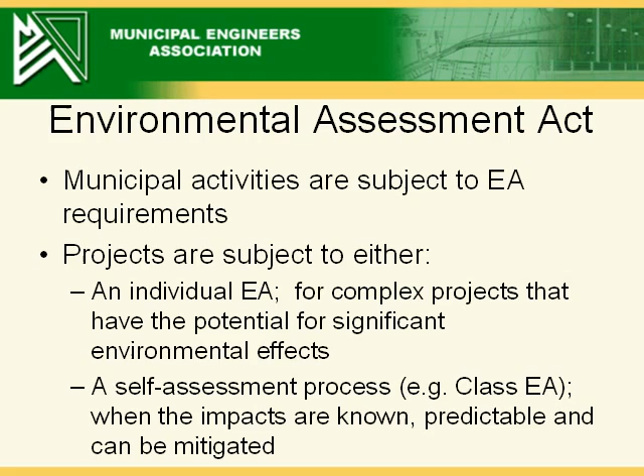What is a Class Environmental Assessment? A Class Environmental Assessment is a self-assessment planning process that allows proponents to follow an approved planning process for projects that are generally recurring, have a predictable range of environmental effects, and are responsive to mitigation.

The MCEA has been subject to review and approval under the EAA, which determined, in part, that the application of the MCEA process would enable proponents to meet the intent and purpose of the EAA for a specific group of projects. The MCEA provides a reasonable mechanism for proponents to fulfill their responsibilities to the public in an efficient, timely, economic, and environmentally responsible manner.

The nature of the project determines the level of assessment. The assessment is proponent-led. Projects identified in an MCEA are approved and conditional upon being planned according to the requirements set out in the MCEA, not being made subject to a higher order of EA. Part 2 order provisions allow the minister to require an individual EA if significant environmental issues or concerns warrant.

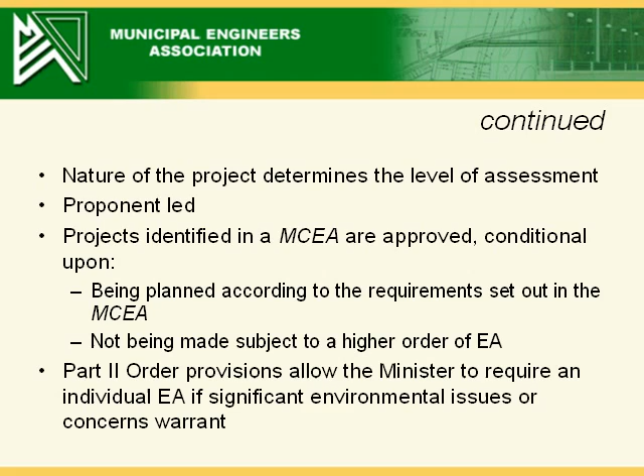The integrated approach still involves the completion of the procedural requirements of this Class EA based on whether the project is classified as a Schedule B or Schedule C project. If the project is defined as a Schedule B project, the proponent must complete Phase 1 and 2 of this Class EA. If the project is categorized as a Schedule C project, the proponent is required to complete Phases 1 through 4 of this Class EA. All Class EA planning principles and mandatory consultation and documentation requirements still apply.

Municipalities and EA practitioners recognize the desirability of integrating the planning processes and approvals under the MCEA and the Planning Act, as long as the intent and requirements of both acts are met. By completing the requirements for environmental assessment and land use planning processes at the same time, proponents can streamline their efforts and more effectively meet the requirements of both the Planning Act and the MCEA.

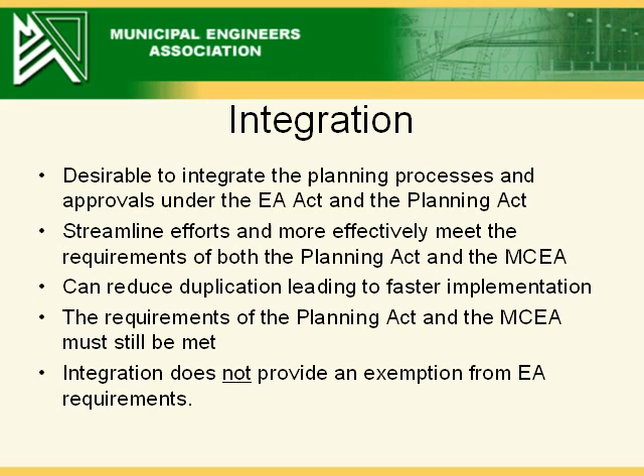Another benefit is reducing duplication, leading to faster implementation. When carrying out an integrated approach, the requirements of the Planning Act and the MCEA must still be met. Integration does not provide an exemption from MCEA requirements.

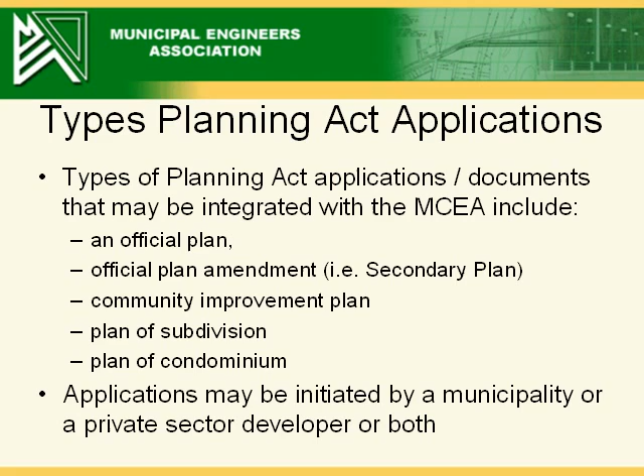The types of Planning Act applications or documents that may be integrated with the MCEA using the integration approach include an official plan amendment including secondary plans adopted as an official plan amendment, community improvement plan, plan of subdivision, and a plan of condominium. Applications may be initiated by the municipality or by a private sector developer or both as co-proponents.

For a project that is subject to this Class EA and which is one of the types of Planning Act documents identified in Section A.2.9 of this Class EA and which has taken effect under the Planning Act, and the proponent has fulfilled the requirements of this Class EA as outlined in this section, then the proponent may proceed to implement the project. It is the responsibility of the proponent to ensure that they have fulfilled all of the Planning Act and EA Act requirements for their project, as well as obtaining any other necessary approvals or permits.

In many cases, it is beneficial to begin the planning process by considering a group of related projects, an overall system, or a number of integrated systems prior to dealing with project-specific issues. By planning in this way, the need and justification for individual projects and the associated broader context are better defined. Long-range infrastructure planning enables the proponent to comprehensively identify need and justification and establishes a broader context.

Within the broad context, a range of infrastructure options can be established and evaluated. The combined impact of alternatives is also better understood, which may lead to better and other solutions. In addition, the opportunity to integrate with land use planning enables the proponent to look at the full impact of decisions from a variety of perspectives, as well as streamline the approvals process.

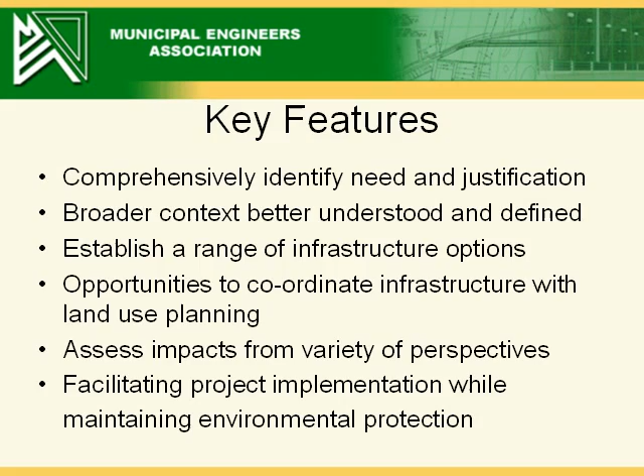Why should an integrated approach be used? Although the requirements of both acts must still be met, there are opportunities to make two processes more efficient. There are opportunities to combine the public and government agency consultation, documentation including technical and supporting studies, land use planning, and infrastructure requirements. Using a coordinated planning approach can be faster than considering requirements and obtaining approvals in a sequential manner, and it can improve planning and land use decision-making processes for municipalities and private sector proponents.

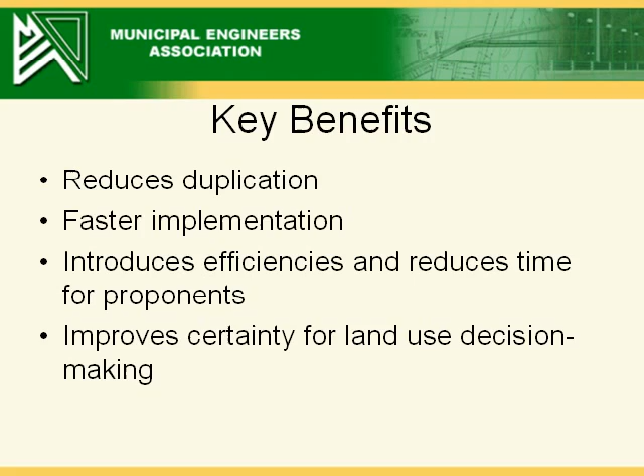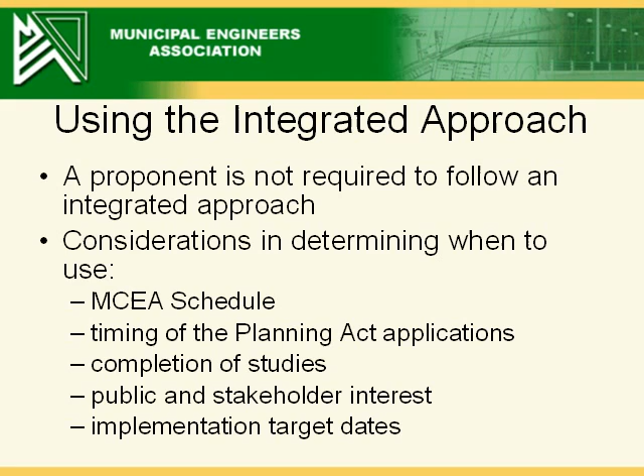Using the integration provisions under the MCEA is voluntary. A proponent is not required to follow an integrated approach if a project has requirements under both the MCEA and the Planning Act. Considerations need to be made by the proponent regarding the MCEA schedule, timing of the Planning Act applications, completion of studies, public and stakeholder interest, and implementation target dates, amongst other factors.

It is possible to terminate an integrated approach once the process has been initiated, if during the course of the project, consideration suggests that two separate processes may be more effective. Work undertaken prior to this decision does not need to be redone, as it was undertaken with the intent of meeting both acts. However, future work must still meet the requirements of this Class EA and the Planning Act approvals process being used.

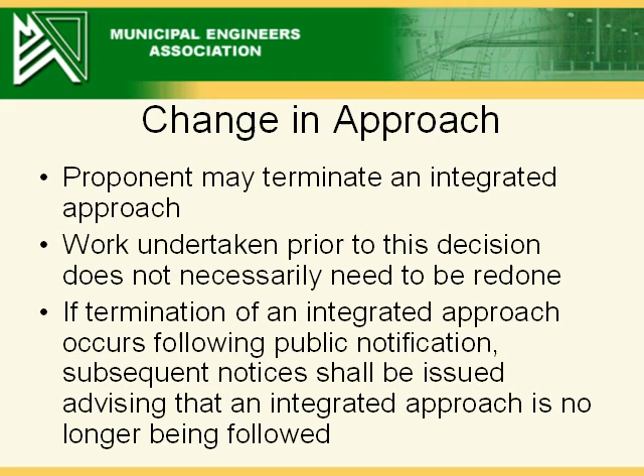If termination of an integrated approach occurs following the announcement or public notification of a project having been given, subsequent notices or independent notices shall be issued advising that an integrated approach is no longer being followed.

The Environmental Assessment Act clearly defines proponent, those persons or entities who are subject to the requirements of the Act. The proponent of a project using the integrated approach is the same as the applicant under the Planning Act, whether the proponent is a municipality, a private sector developer, or both.

Two or more municipalities and/or private sector developers may act as co-proponents. When using an integrated approach, the proponent is the same as the applicant under the Planning Act.

Ontario Regulation 345/93, made under the EA Act, designates private sector developers as subject to the requirements of the EA Act if a private sector developer is proposing an undertaking of a type listed in Schedule C and the undertaking involves the provision of roads, water, or wastewater facilities for the residents of a municipality.

The requirements of the integrated approach are the same for municipalities and private sector proponents. Regulation 334 enables all municipalities to make use of the MCEA process to fulfill EA Act requirements. Public sector proponents include municipalities, Public Utilities Commission, and the Ontario Clean Water Agency.

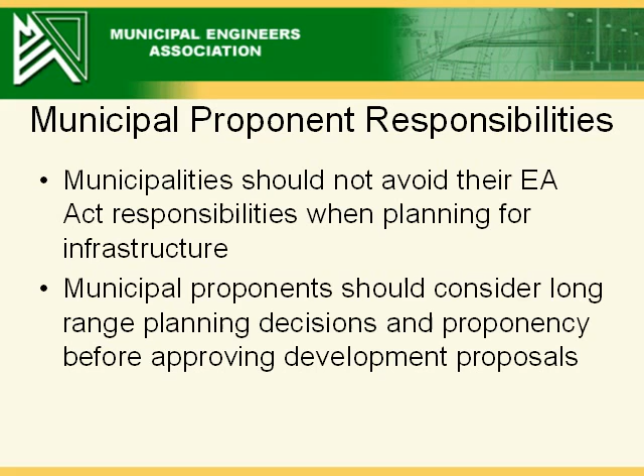Municipalities should not avoid their EA Act requirements through the use of conditions on a Planning Act approval where the appropriate proponent for the work is the municipality. Municipal proponents should consider long-range planning decisions and proponency before approving development proposals.

A number of municipalities and/or private sector developers may jointly undertake a project for their mutual benefit as co-proponents. Class EA requirements and schedules for an integrated project where there is more than one proponent shall be those of the municipality, and the higher schedule applies.

For example, there may be situations where co-proponents of a project may be considering a Schedule B activity. If the co-proponency involves a private sector developer, the MCEA requirements are those of the municipality and not the private sector developer.

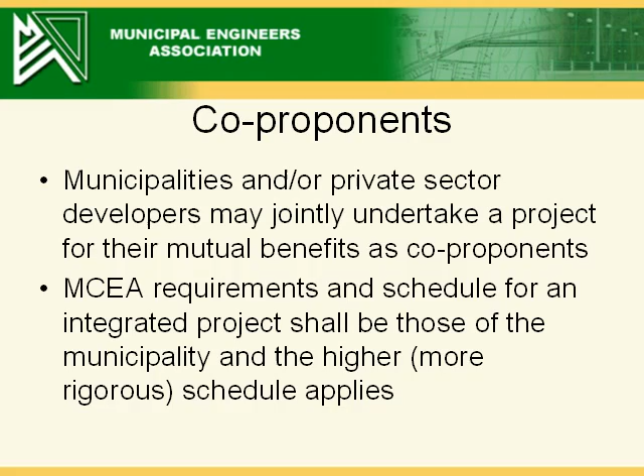Proponents may also change during the planning and implementation of a project. It may be necessary for a change in the proponent of the project to be made, particularly if the MCEA process is carried out over a long period of time or if a master planning approach is used to consider the long-term need for the future infrastructure. Initial Class EA phases may be completed by one proponent, and following phases may be completed by another.

For example, a municipality may use a master plan to complete phases 1 and 2 of this Class EA process, while a private sector proponent, building upon the work completed by the municipality, completes phases 3 and 4 through the standard Class EA process or through the use of the integrated approach.

If a proponent is relying on work completed by another proponent to fulfill their requirements under this Class EA, the proponent needs to ensure that the work being relied upon meets the requirements of Section A.2.9 and that they are able to make use of the work completed by the other proponent. There may be restrictions on the use of previous work by others, for example, reliance or copyright.

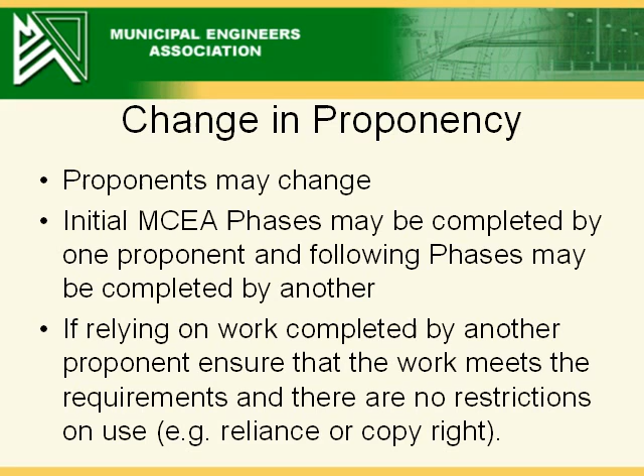Projects being planned using the integrated approach can include infrastructure located on lands beyond the boundaries of the lands that are the subject of the specific Planning Act application, provided that the need for the infrastructure is triggered by the project being planned. Any infrastructure extending beyond the Planning Act application boundaries must be directly related to and required by the application.

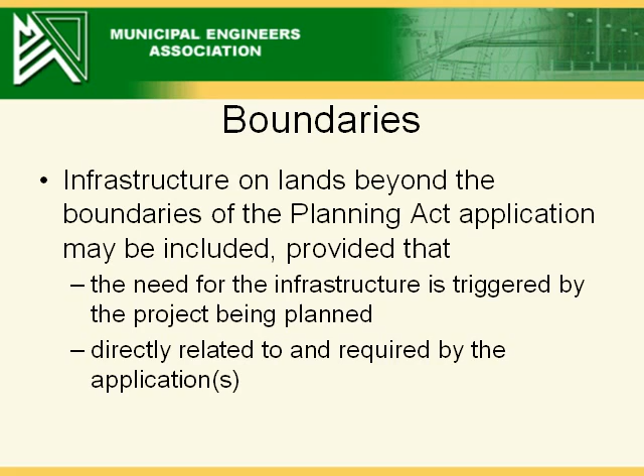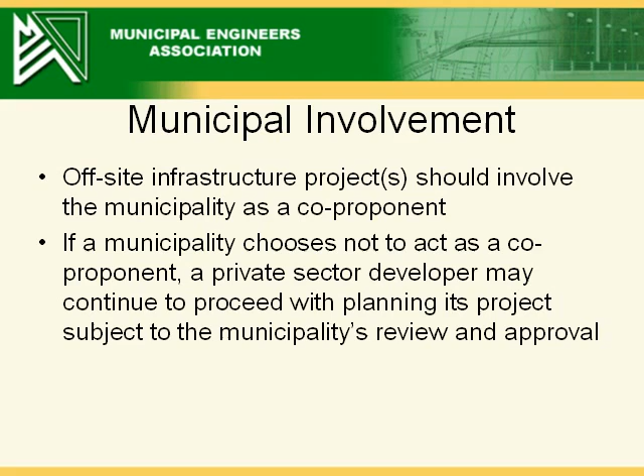If infrastructure beyond the boundaries of the Planning Act application is required, the off-site infrastructure project should involve the municipality as a co-proponent. A municipality that chooses not to act as a co-proponent may still authorize a private sector developer to proceed with the project, subject to their municipality's review and approval.

When a project extends beyond the Planning Act application boundaries, the associated investigations and documentation for the integrated approach also need to extend beyond those boundaries. For example, documentation of existing or baseline conditions and environmental effects would need to be expanded appropriately beyond the Planning Act application boundary to reflect the potential effects of both the on-site and off-site infrastructure.

Recognizing that off-site infrastructure is needed may not be possible at the earliest stages of project planning, when the need for specific infrastructure may not yet have been determined. The level of information included in the notices should increase as project planning decisions are made.

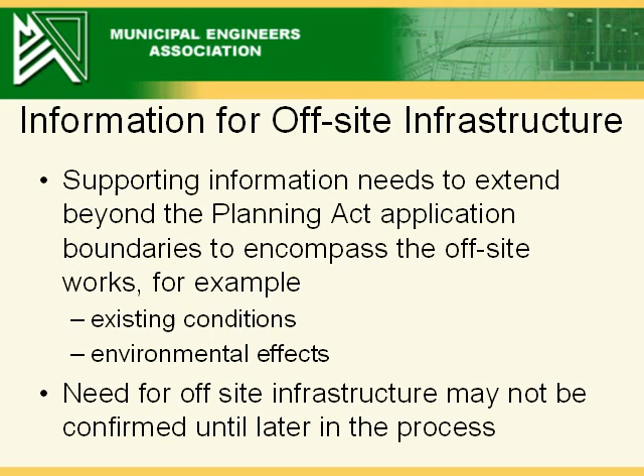Under the integrated approach, mandatory points of contact and minimum notification requirements remain the same as outlined in sections A.3.4, A.3.5.3, A.3.6, and A.3.7 of this Class EA. Consultation, including notices, is the responsibility of the proponents.

Under the Planning Act, municipalities and/or approval authorities are required to issue notices of statutory meetings and notices of decision. If the proponent of the project following the integrated approach is not the municipality and/or the approval authority, the proponent is encouraged to work with the municipality and/or the approval authority to coordinate the notices of public meetings and notices of decision with the corresponding notifications required under the MCEA for both timing and content requirements.

Concurrent tasks, such as public meetings, may occur and combined notices could be issued under this Class EA and the Planning Act. The content of combined notices will vary according to the type of Planning Act application and its associated regulatory requirements and the applicable MCEA schedule.

Differences between MCEA notices and Planning Act notices may relate to factors such as timing, distribution, content, format, and author. When combining notices to meet the requirements under the MCEA and the Planning Act, the proponent must ensure the requirements of both are met.

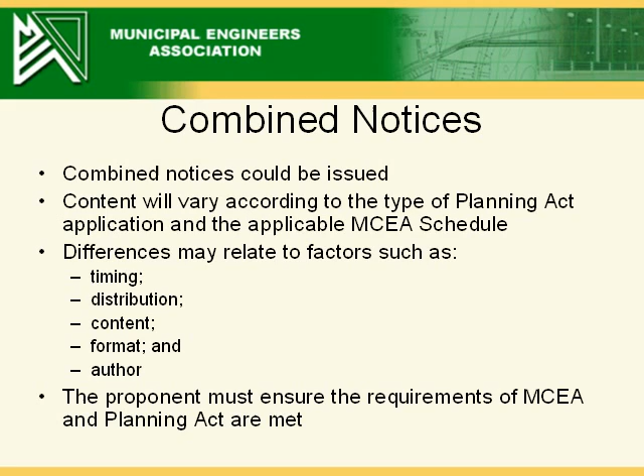Combined notices must, at a minimum, include the following: a clear statement that an integrated approach is being used, a clear statement that appeal on the Planning Act application and related infrastructure is to be made to the OMB, and a clear statement that a Part 2 order request may be made to the Minister of the Environment if there are unresolved, significant environmental concerns.

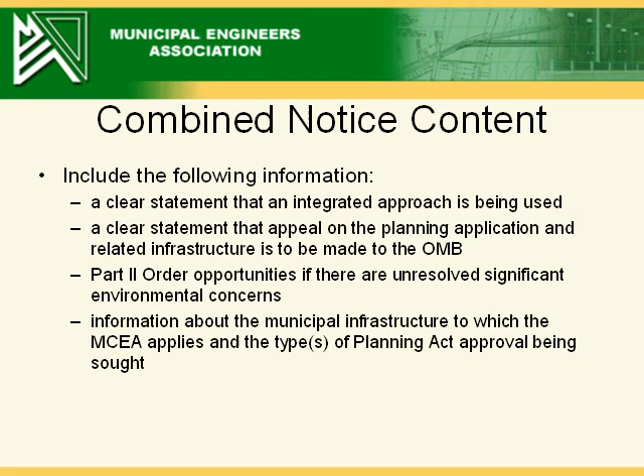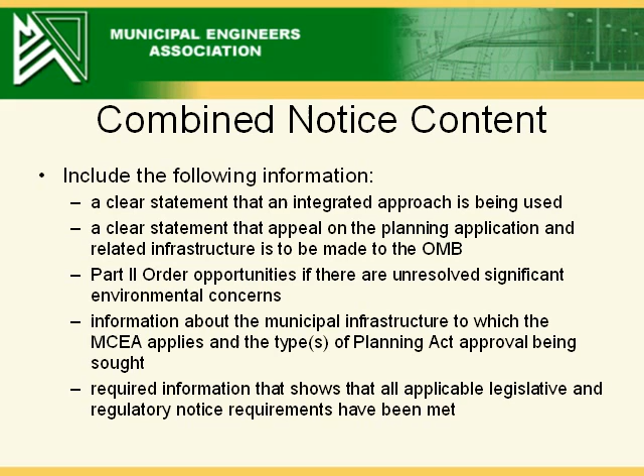A description of the project which includes information about the municipal infrastructure to which this Class EA applies and the type of Planning Act approval being sought, and required information that shows that all applicable legislative and regulatory notice requirements under the Planning Act and this Class EA have been met.

Documentation and supporting technical reports must be provided to review agencies and key stakeholders for their review and comment as required. Where studies are necessary to support the decisions made, the feasibility of the preferred alternative, and the conclusions drawn about environmental impacts and mitigation measures, these technical studies must be provided to the review agencies at an early stage in the integrated planning process before the 30-day review period.

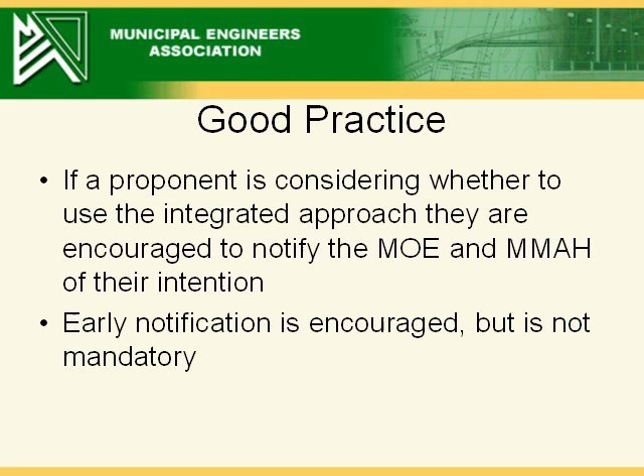If a proponent is considering whether to use the integrated approach to satisfy their requirements under the Planning Act and this Class EA, proponents are encouraged to notify MOE's regional office, Air Pesticides and Environmental Planning Supervisor, and the Director of Environmental Approvals Branch, and the applicable MMAH Municipal Services Office of their intention. Early notification is encouraged, but it is not mandatory.

The Class EA documentation supporting a Planning Act application must be made available to the public and shall include a statement of the purpose, problem, or opportunity, details of the planning process followed, details of the consultation carried out, existing environmental conditions, alternative solutions and evaluation of its potential environmental effects, the preferred solution and its effects on the environment, the mitigation measures to be implemented, and commitments made during the planning process.

When preparing documentation for an integrated project that involves a Schedule C activity, the documentation must be clear and traceable. Documentation may be in the form of an environmental study report or an equivalent form, provided that all of the information required as per the MCEA is addressed.

Following the issuance of the Notice of Completion, documentation must be provided for a minimum 30-day public review. Depending on the MCEA schedule being followed, interested persons, including Aboriginal communities, regulatory agencies, and the public, must be consulted and feedback obtained during the development and assessment of the proposed project. This stage of consultation is not part of the 30-day public review and should occur during the integrated process.

Public review periods may differ for Planning Act and MCEA processes. For example, where an official plan amendment is being sought, the Planning Act requires that a copy of the application and related information and material be made available for public inspection at least 20 days before holding a public meeting. When using the integrated approach and combining notices to meet the requirements under the MCEA and the Planning Act, the proponent must ensure the requirements of both are met.

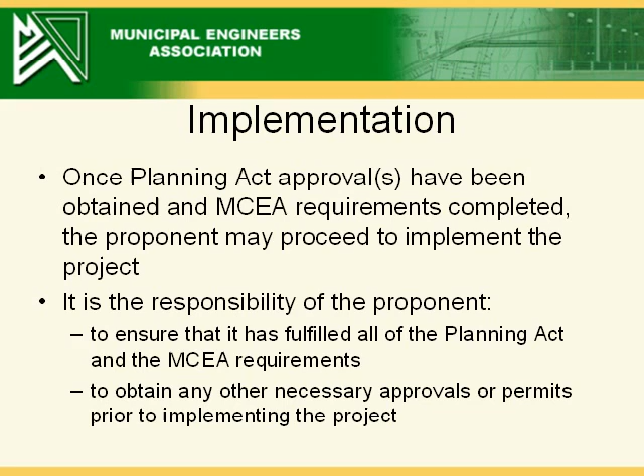Once all necessary Planning Act approvals have been obtained and the integrated planning process as described in Section A.2.9.3 is complete, the proponent may proceed to implement the project. It is the responsibility of the proponent to ensure that they have fulfilled all of the Planning Act and the MCEA requirements for their project and obtained any other necessary approvals or permits prior to implementing the project.

It may be necessary to revise a project that has been planned using the integrated approach due to environmental implications of changes to the project or due to a delay in implementation. Changes to a project can be made following the addenda procedures outlined in the MCEA, refer to Section A.4.1.1 and A.4.3.

If a proponent planning a project using the integrated approach has fulfilled its requirements under the Planning Act and EA Act, the project will be subject to requirements associated with the Planning Act approval and not the time-lapse provision set out in the MCEA. The Planning Act does not contain an automatic review of an approval or an automatic expiry if a Planning Act approval is not implemented.

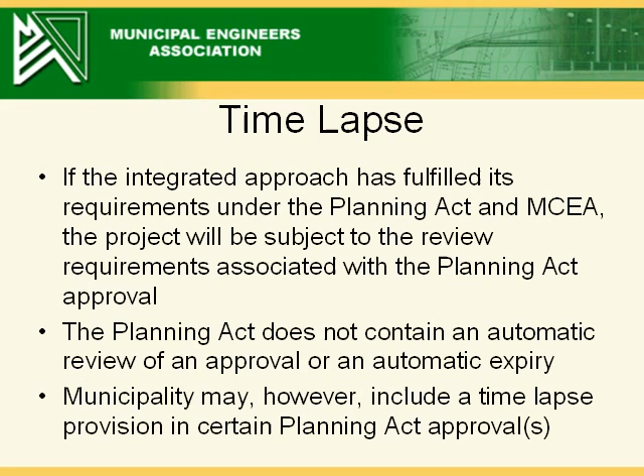A municipality may, however, include an approval expiry provision in certain Planning Act approvals. For example, a municipality may identify a deadline for the proponent to fulfill the conditions of a draft plan of subdivision and/or seek reconsideration of matters through its regular planning reviews.

As a matter of good practice and to ensure its currency, municipalities and private sector proponents should undertake a review of the documentation prepared in accordance with Section A.2.9.4 if the infrastructure has not been constructed within 10 years.

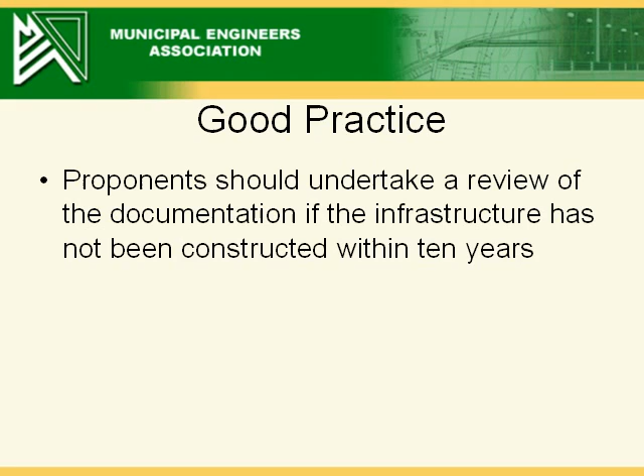The municipality may also apply conditions to planning approvals to require review of the documentation prepared in accordance with Section A.2.9.4 if the infrastructure has not been constructed within 10 years.

After proponents have completed a project using the integrated approach, proponents should briefly summarize how a project has met the conditions in Section A.2.9. Summaries of 1 or 2 pages should be submitted for information and tracking purposes to the Director of Environmental Approvals Branch at the MOE, including copies of the mandatory public and review agency notices. Doing so will assist in monitoring the effectiveness and benefits of the integrated approach.

The information provided to the Director of Environmental Approvals Branch at the MOE should include a description of the Planning Act application that was integrated with the Class EA process, how the requirements of the Class EA process were fulfilled with respect to the appropriate Phase 1 through Phase 4 requirements, consultation undertaken including copies of notices, and project documentation.

Why is there a 30-day review required when the Planning Act requires 20 days? When combining notices to meet the requirements under this Class EA and the Planning Act, the proponent must ensure the requirements of both are met. The more rigorous, stringent requirements apply.

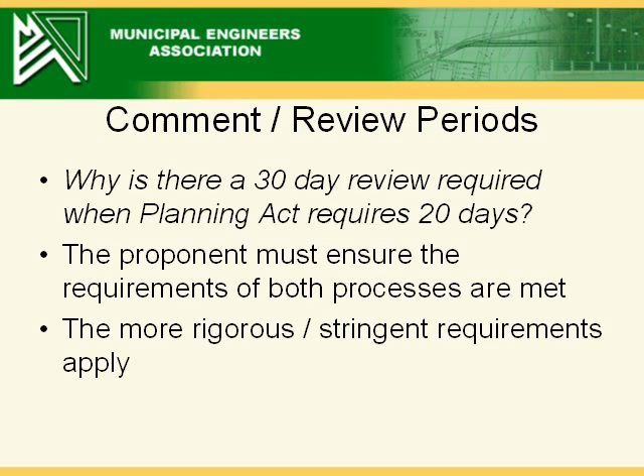Who can I contact for more information? Guidance on the integrated approach can be sought from MOE Environmental Approvals Branch, Environmental Approvals Access and Service Integration Branch, MOE Regional Offices, and applicable MMAH Municipal Services Office.

How can Class EA Schedule A projects be addressed in an integrated approach? Schedule A and A+ projects are considered pre-approved under the Class EA and may proceed to implementation without following the full Class EA planning process. Schedule A+ projects are required to notify the public prior to project implementation. No integration is required.

The following information is provided for proponents not familiar with MCEA requirements. Contact the MOE Regional Offices, Environmental Approvals Branch, or both, and/or MMAH for guidance about expected requirements regarding the use of the MCEA integration provisions.

Identify how the project fits in with existing and future land uses, connects with other existing and future infrastructure facilities and/or services. Identify expected environmental impacts, both positive and negative, and proposed measures to mitigate potential negative impacts.

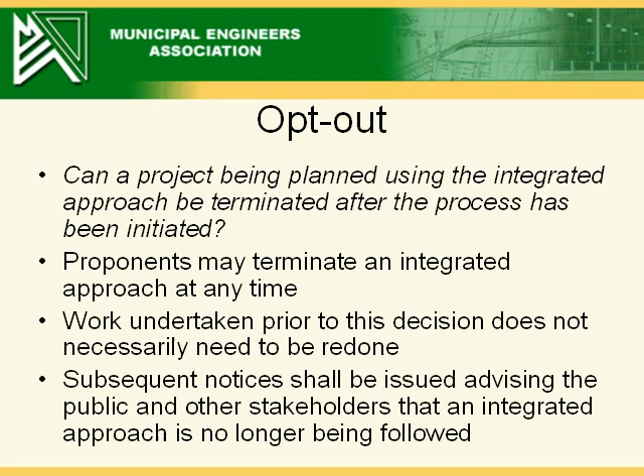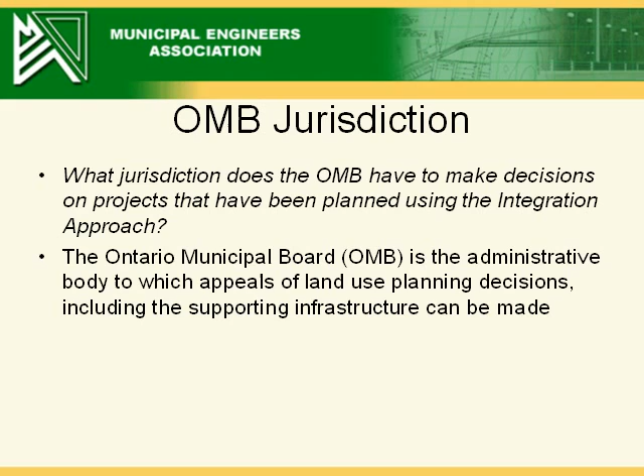What jurisdiction does the OMB have to make decisions on projects that have been planned using the integration approach? The Ontario Municipal Board, or OMB, is the administrative body to which appeals of land use planning decisions, including the supporting infrastructure, can be made.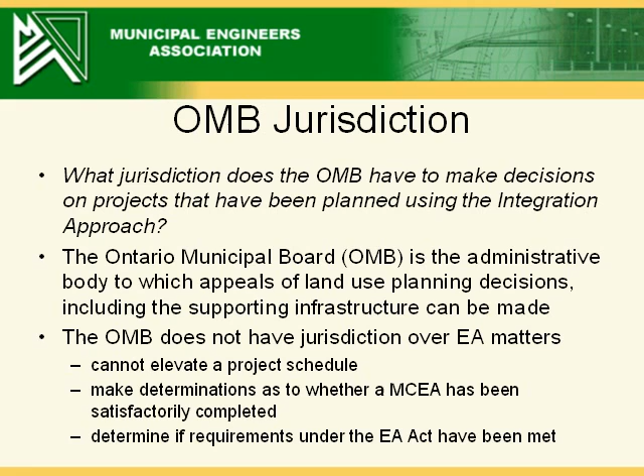The OMB does not have jurisdiction over EA matters and cannot elevate a project schedule or make determinations as to whether an MCEA has been satisfactorily completed or if requirements under the EAA have been met.

If there are significant unresolved environmental concerns about an integrated project, the MOE has taken the position that anyone may request under Section 16 of the EAA that the Minister make an order to elevate a project to Part 2 of the EAA, thereby requiring the preparation of an individual EA.

The ability to request a Part 2 order under Section 16 of the EAA is currently referenced in Section A.2.8.1 of the MEA MCEA.

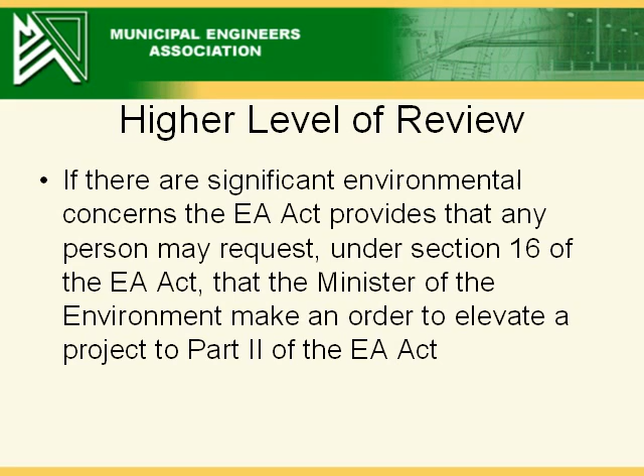A Part 2 order request should not be used to revisit issues that the requester does not agree with and have already been decided through another planning process, such as official plans, growth plans, and infrastructure plans; because a project is not desired in a community; to resolve land use planning issues, including environmental matters that can be dealt with through other appropriate processes, example, an OMB hearing; and to stop, delay, or frustrate the planning of an integrated project.